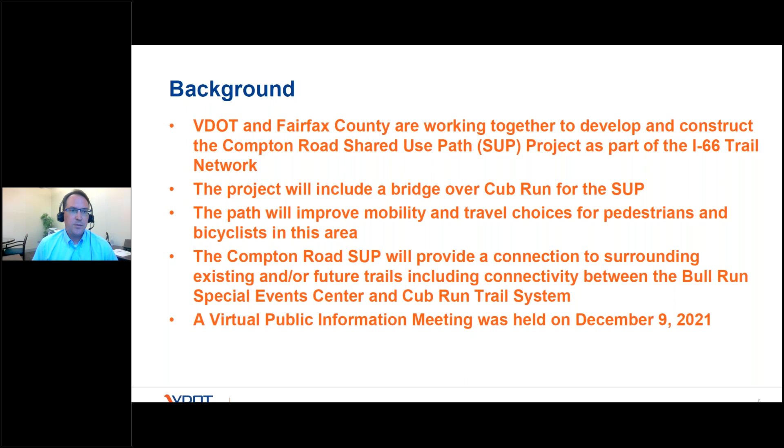Thanks, Andy. As mentioned, my name is Kevin Hurt, and I'm the Consultant Project Manager for the project. First, I would like to walk through the surrounding trail network, and then we'll review the project design. For this project, VDOT and Fairfax County are working together to construct the Compton Road Shared Use Path. It will provide connectivity between the Bull Run Special Events Center and the Cub Run Trail system, as well as other trails in the area.

The intent of this project is to improve mobility and travel choices for pedestrians and bicyclists in the area, and will include a bridge over Cub Run to safely facilitate the shared use path over the river. The shared use path will also provide a connection to surrounding existing and/or future trails, which will be discussed in the presentation. A virtual public information meeting was held for this project on December 9th, 2021.

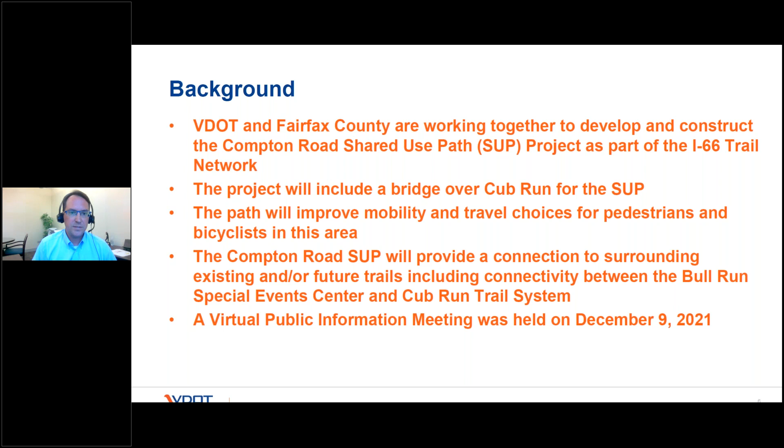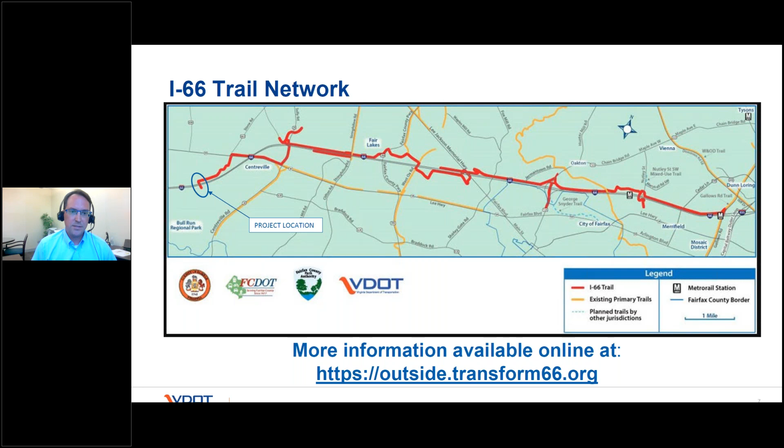Now I'd like to discuss the I-66 trail network and how this project will be integrated into that. As shown on this slide, the I-66 trail network is extensive, and this project provides a connection to this trail, as shown on the left of the slide.

This slide shows the trail network in the area, including the Bull Run Loop Trail, Sully Loop Trail, and the West County Trail. It also shows how the project will be integrated with each, as shown on this slide.

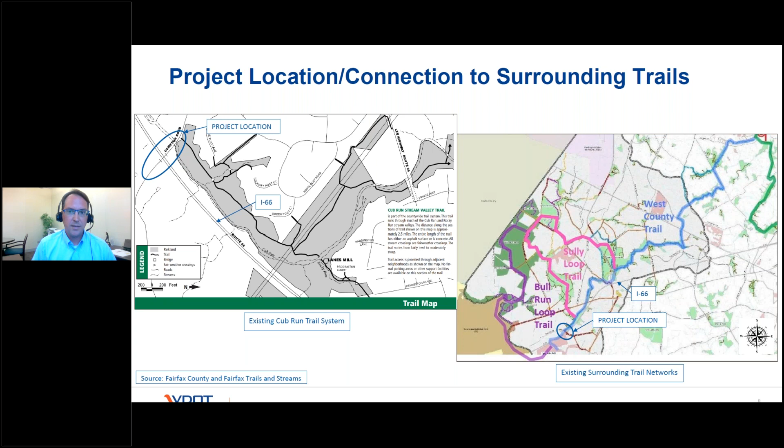As mentioned on the previous slide, this graphic shows a more detailed view of the direct connection between the project and the surrounding trails adjacent to it. The Cub Run Trail, which connects to the Sully Loop Trail, is shown in red. The West County Natural Trail, which connects to the Bull Run Loop Trail, is shown in green.

Along the southern side of the project, the Compton Road shared use path will provide a connection to future trails under development along Compton Road and points south, shown in purple. Furthermore, the pedestrian and cyclist improvements to Mount Olive Road are currently not funded, and no schedule has been established for their construction. FCDOT will be pursuing funding for these improvements going into the future. This slide also shows the three sections of the shared use path.

The first portion will be constructed north of the I-66 bridges over Compton Road. The second portion is currently under construction and is located under the I-66 bridges as a part of the Transform 66 project. The third portion will be constructed south of the I-66 bridges. This slide also shows the proposed path crossing Compton Road at the Bull Run Special Events Center Drive.

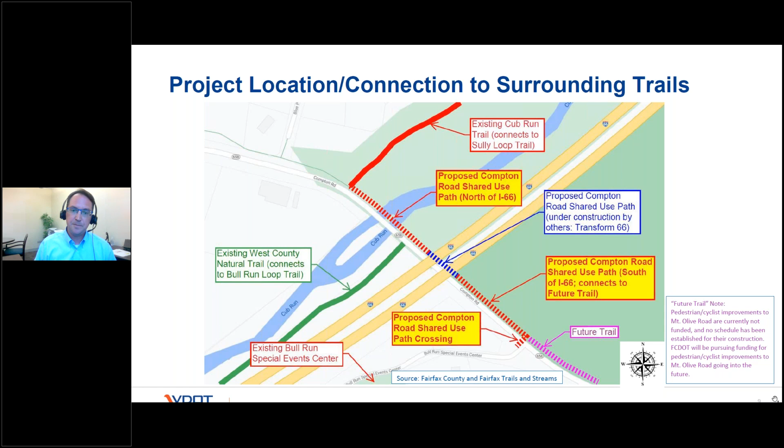Building off the previous slide, we wanted to discuss the three sections in more detail. The shared use path south of I-66 is a section that will be constructed south of the I-66 bridges to the Bull Run Special Event Center Drive, including a crossing of Compton Road. The shared use path will be approximately 430 feet long and 10 feet wide.

The shared use path north of I-66 is a section that will be constructed north of the 66 bridges and will provide a connection with the existing Cub Run Trail. This segment includes items that will add to the construction duration, which are the bridge over Cub Run and a waterline relocation due to the project fill slopes. The shared use path will be approximately 380 feet long and 10 feet wide.

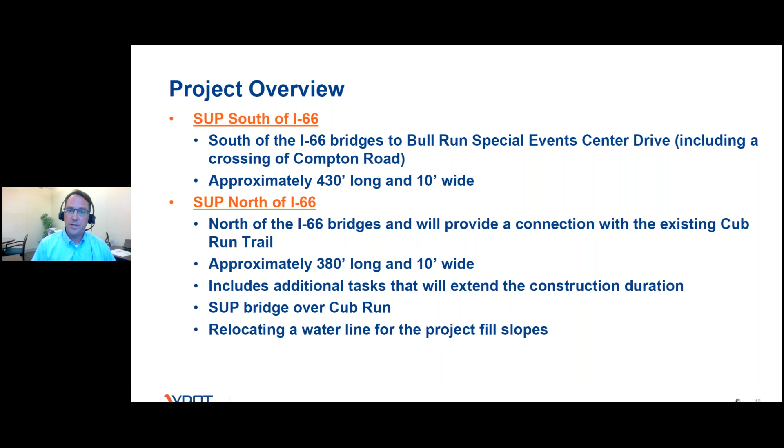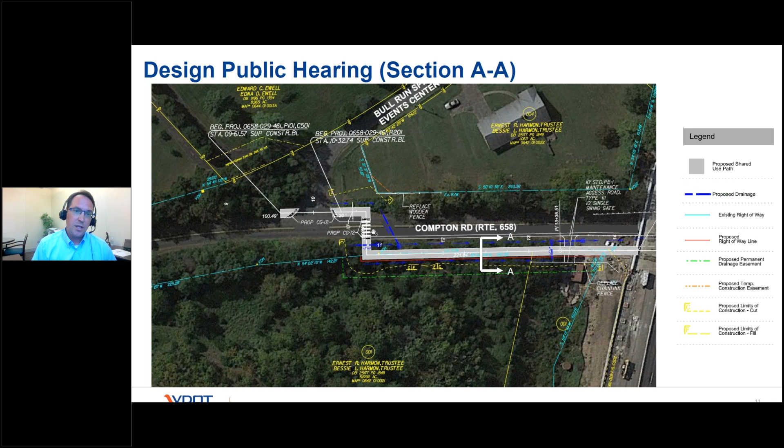This slide shows the shared use path layout south of the I-66 bridges. The path is shown in gray. Also shown here is the path crossing Compton Road at the Bull Run Special Event Center Drive. Note the section call out AA, which we will discuss on the next slide.

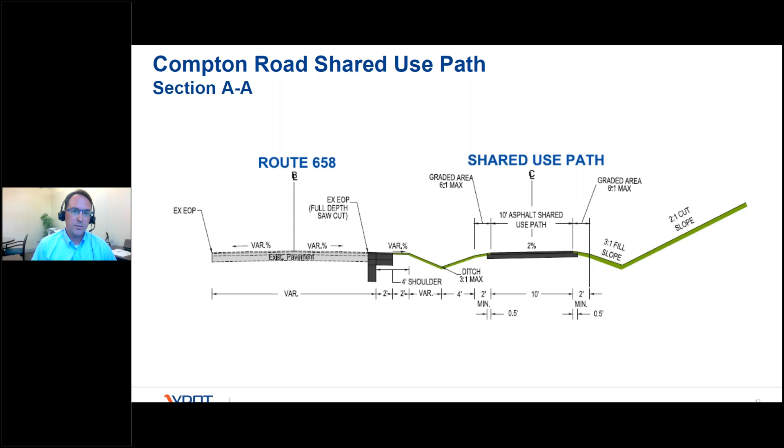This is a cross-sectional view of the area, and as shown, the path will be 10 feet wide and will have a minimum 2-foot graded shoulder and ditches on each side as required to prevent stormwater runoff from crossing the path. The section also shows shoulder improvements along Compton Road to improve the Compton Road shoulders in this area.

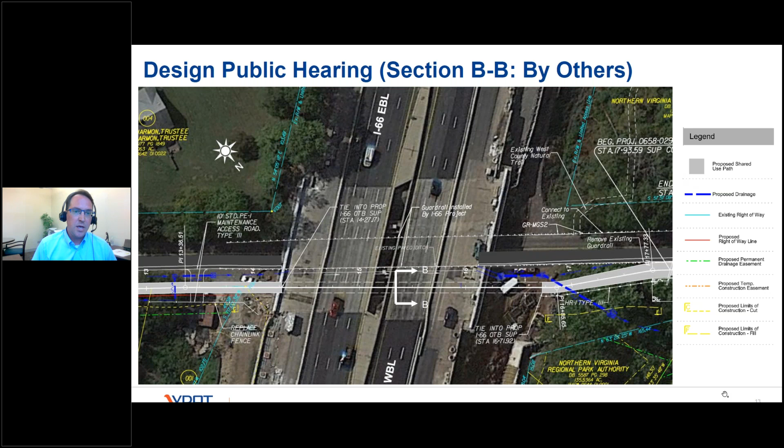This slide shows a section of shared use path that is currently under construction under the I-66 bridges. Note the section call out BB, which we will discuss on the next slide.

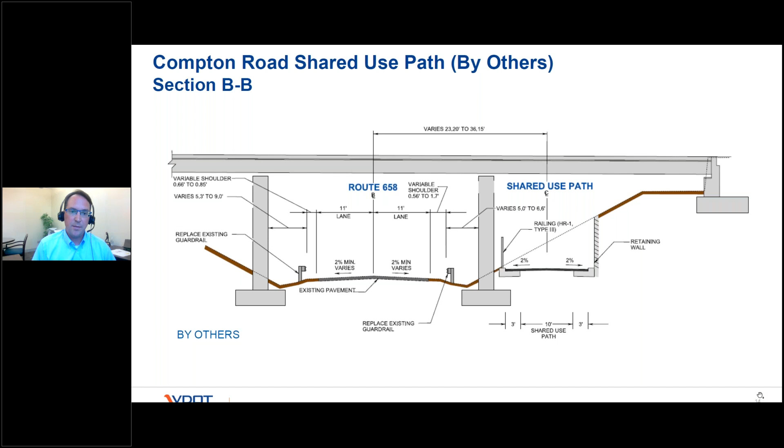This is a cross-section view of the area, and as shown, the path will have a similar 10 feet width. Also, a 3-foot buffer will be provided between the required handrail and retaining wall in this section. This is a constrained area, and the path is required to fit between the newly constructed retaining walls and bridge piers.

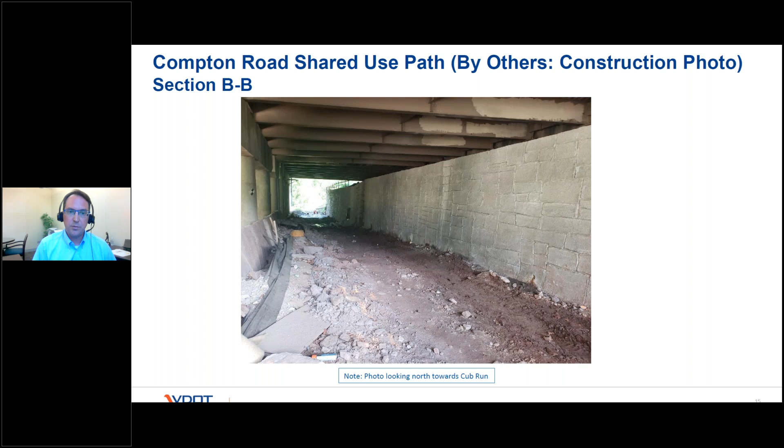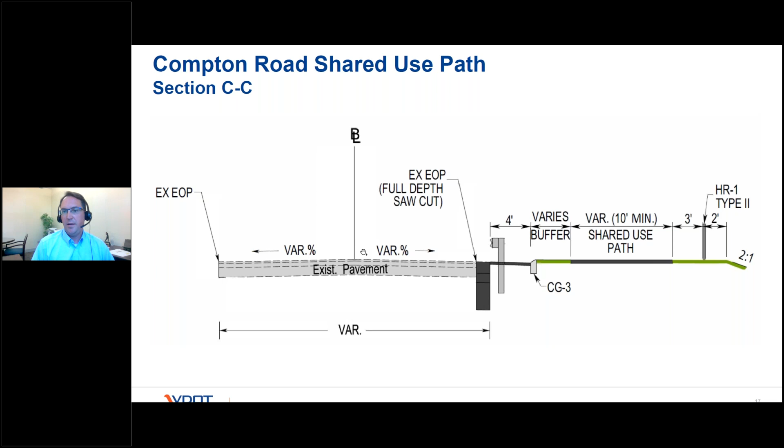This is a section view of the area, and as shown, the guardrail will be installed on the left and a handrail on the right. The path is 10 feet wide, and a 3-foot buffer is shown between the path and the handrail.

The final section includes the bridge over Cub Run, which will accommodate the shared use path. A barrier will be provided on the bridge to separate the path from the vehicles traveling on Compton Road.

To build this section, traffic will likely be reduced to 1 lane during portions of construction with a temporary signal. To improve constructability and reduce impacts to traffic, the VDOT design team is evaluating a separate bridge structure for the shared use path, constructed adjacent to the existing bridge with a planned 5-foot separation. New abutments will be added to support the shared use path bridge and will be designed to accommodate flooding of Cub Run.

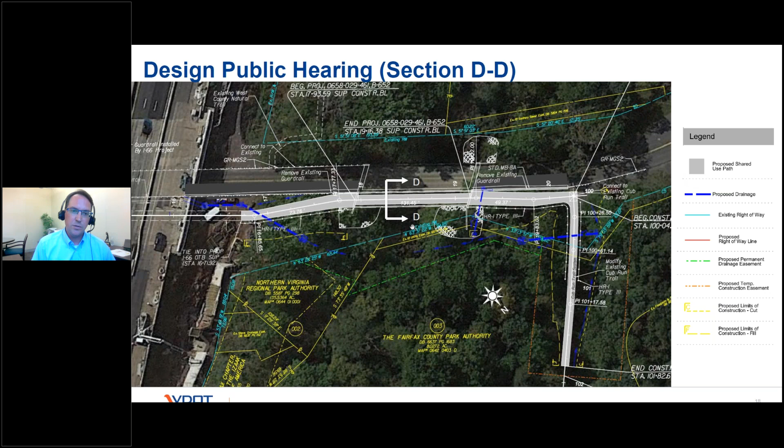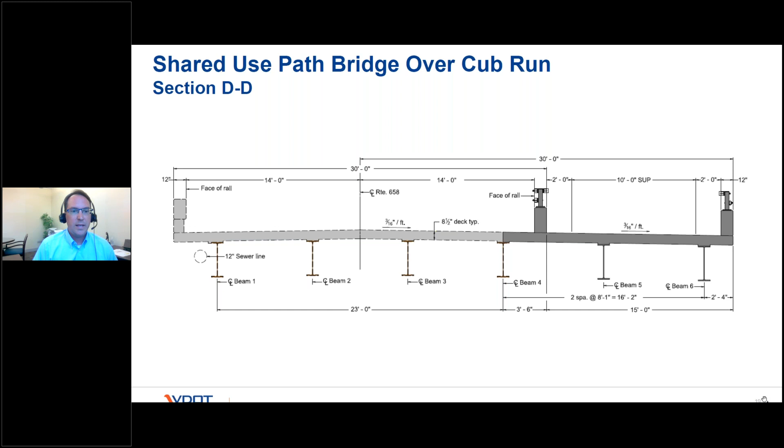This is a section view of the shared use path bridge over Cub Run. The path will be 10 feet wide with a 2-foot buffer between the edge of the path and the bridge barrier. As mentioned before, you can see where the barrier will be provided between Compton Road and the path for safety. Now I'd like to turn it over to Jenny to discuss the proposed right-of-way acquisitions.

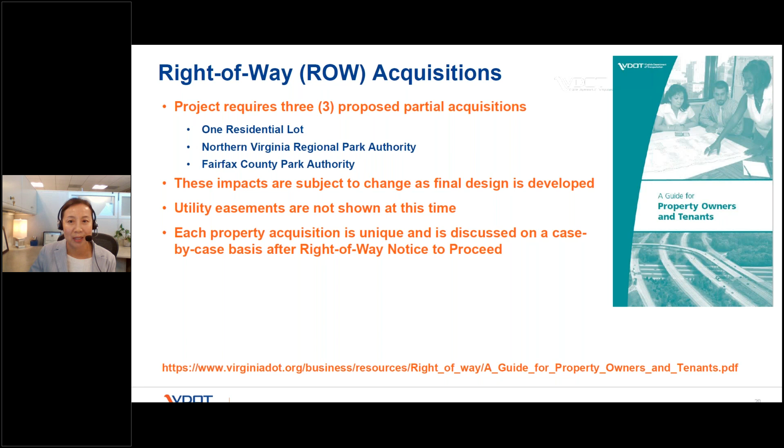Each federally funded project will have a corresponding NEPA document that demonstrates compliance or no impact to this policy. The level of NEPA documentation is determined based on significance of impact. This project qualifies for a Programmatic Categorical Exclusion, PCE, due to very limited impacts, and the PCE is being prepared.

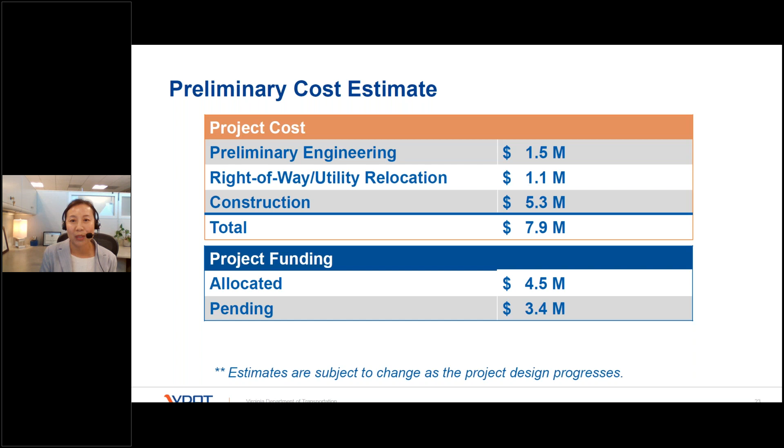Following tonight's virtual public hearing meeting, the public comment deadline will be July 11. As mentioned in the schedule slide, next steps are to get design approval this fall, and we anticipate beginning right-of-way acquisition and utility relocation in spring 2023. I will now turn it over to Carol Sinclair to lead us in how to submit comments.

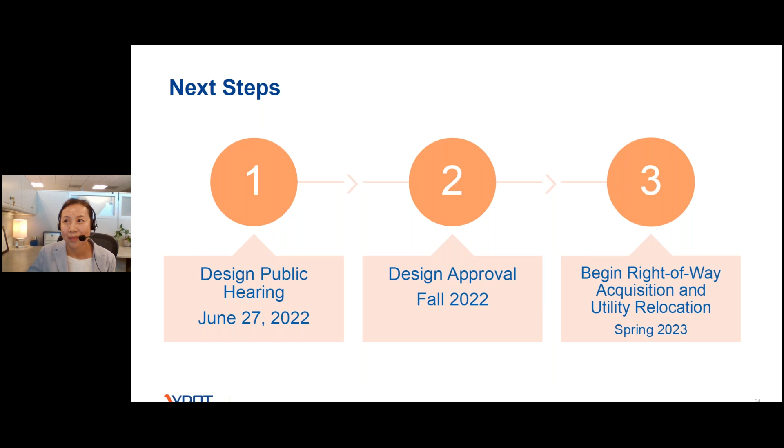As a reminder, during our Q&A session, we'll be taking both written and verbal questions. In your control panel, there is a question pane that will allow you to submit written questions. If you would like to ask a verbal question, you can select the Raise Your Hand button. I will call on you when it's your turn to ask your question. If you're asking a verbal question, we will need to unmute you, and then you will need to unmute yourself before everyone will be able to hear you. Once you ask your verbal question, please remember to lower your hand by clicking the Raise Your Hand button again. As we stated at the beginning of the presentation, all participants will be muted. And if you get disconnected, please attempt to rejoin.